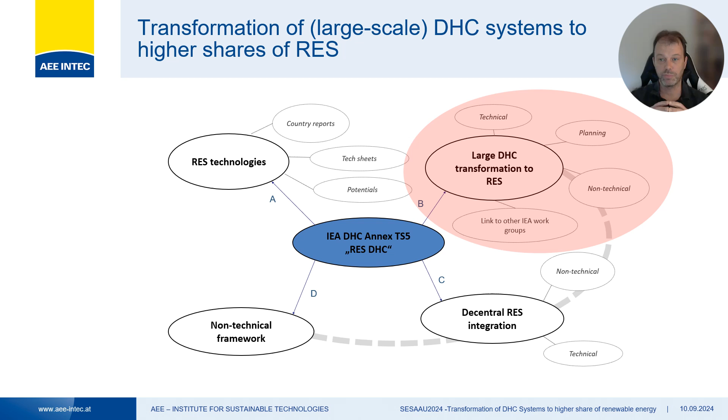We also focus on how to get renewables into the larger system, technical and non-technical things here as well. What I will be talking about today is largely subtask B, focusing on the transformation process from different points of view. Now let's continue.

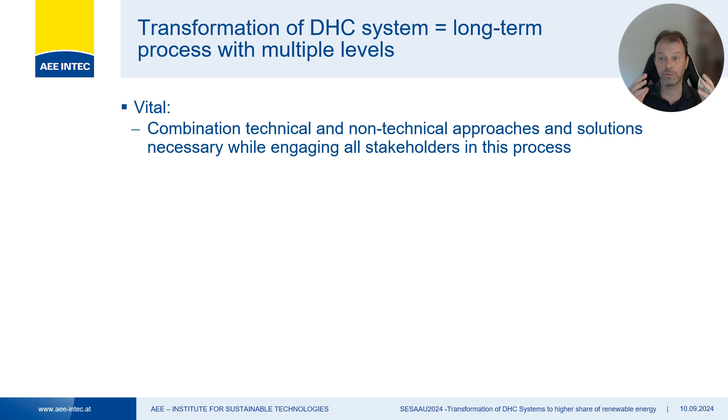We see transformation processes as a long-term process with multiple levels, and we've concluded within the project that it's vital to combine technical as well as non-technical approaches and solutions in the process, while it's really important to also discuss and talk with all these stakeholders in the process.

How we came to that conclusion is we looked at different international case studies. We tried to identify what the bottlenecks, challenges, and key enablers were in the transformation processes, and which steps and interventions were done to really make a step forward.

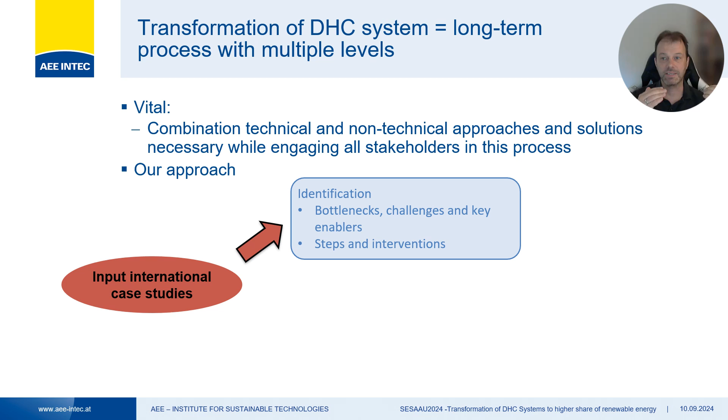Like I said, it's a long-term process, so not all of the systems and case studies we investigated are concluded, but we looked at the steps already taken and analyzed them. Based on these conclusions from the case studies, we tried to define something like a guideline, a checklist, for how you can do the transformation process.

We also checked this transformation guideline with some pilot studies, to get information on what might still be missing and what we still have to add.

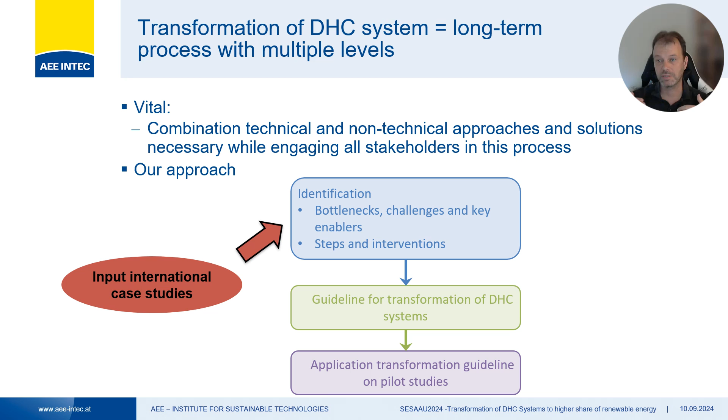We had in total 7 larger case studies that we investigated, plus a couple of smaller ones. We looked specifically for information on basically every aspect of such a transformation process, so we looked for instance at what was the goal, what was the timeline, what was going on, what was going well, where were the problems, and so on.

To give you an example of what we did, here I focus on the example of Lviv in Ukraine. We checked how the system is behaving and how large it is. Lviv is one of the larger cities in Ukraine, located in the west of the country, and it has an outdated district heating system, or rather separate ones across the town, with heat supply currently largely provided by major gas CHP installations, with some smaller fossil fuel-based units as support.

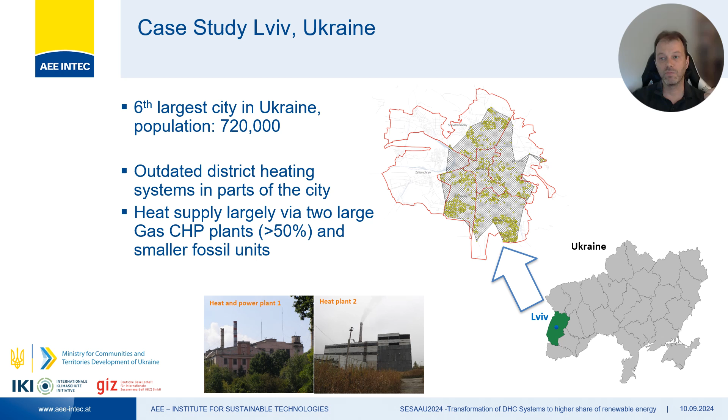So what we did in the process there was analyze the steps. They did an analysis of the gas consumption, what is happening on a daily basis, and tried to come up with something like a plan for how they can reduce that over time in different steps.

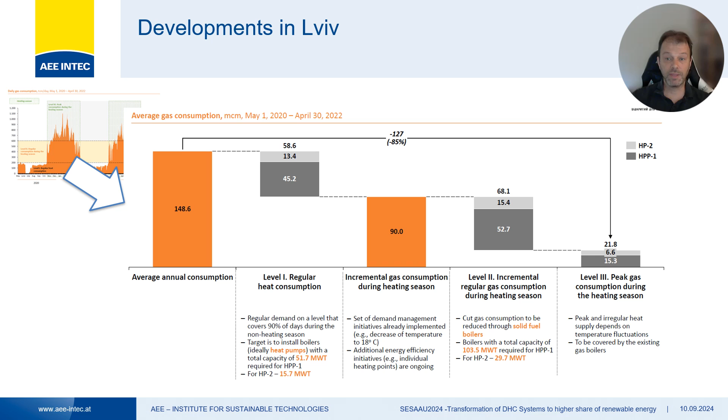Then they looked at what might be potential solutions or spots to really go for district heating, to densify the systems, or to go for other solutions. Based on that, they came down with an actual plan for how they can implement the different measures.

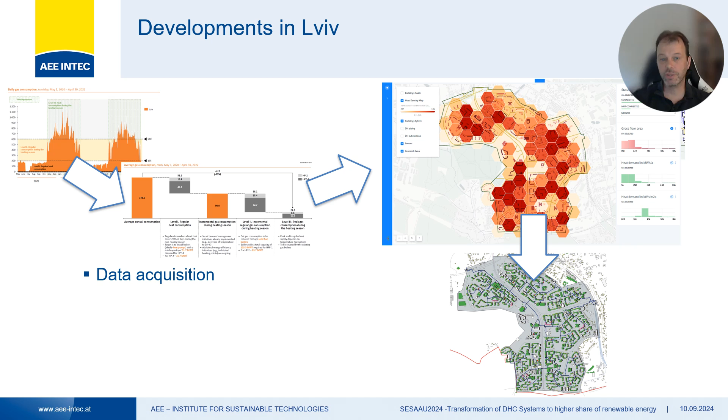During the process, they had to look at different things they weren't aware of so far, meaning data acquisition, spatial energy planning, capacity building, stakeholder integration, and basically how to do good strategic planning in relation to short-term measures that were necessary over the last couple of years in Lviv because of the war going on. Now, this was the foundation for us to proceed with our analysis.

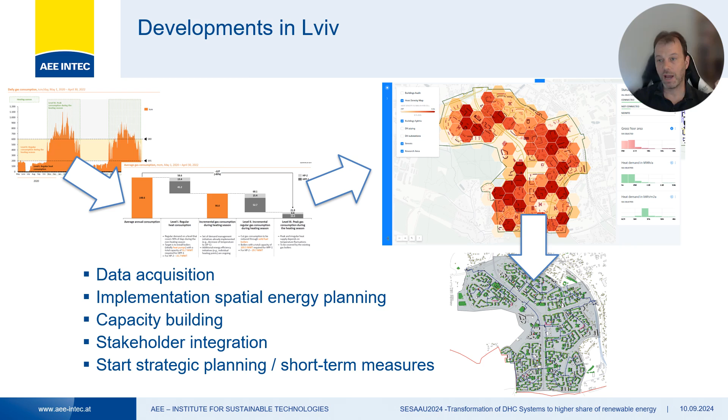So now I'm coming back to the picture of this tree in the background and the saplings in the foreground. To make it really happen that a sapling like the ones in front can really grow towards a larger, healthy tree like in the background, there are different things that are really necessary.

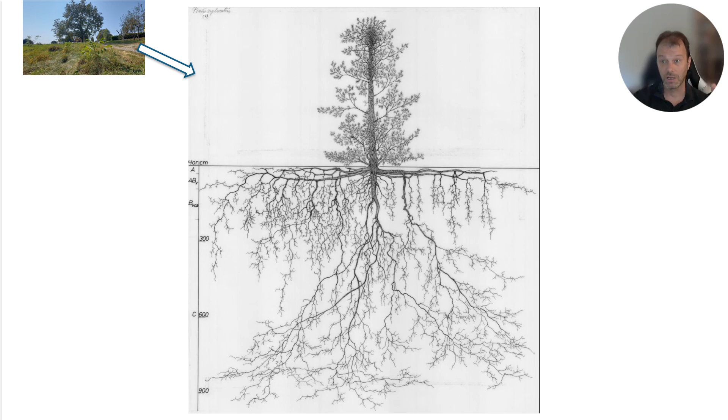Most of these things are not directly on the surface, but located in the background, in the soil in this case, or even beyond what the tree actually can do on its own, respectively what the surrounding can offer. So you might have all these assets, all this infrastructure available, but underneath there are different processes, different things that have to be aligned to really make a transformation happen.

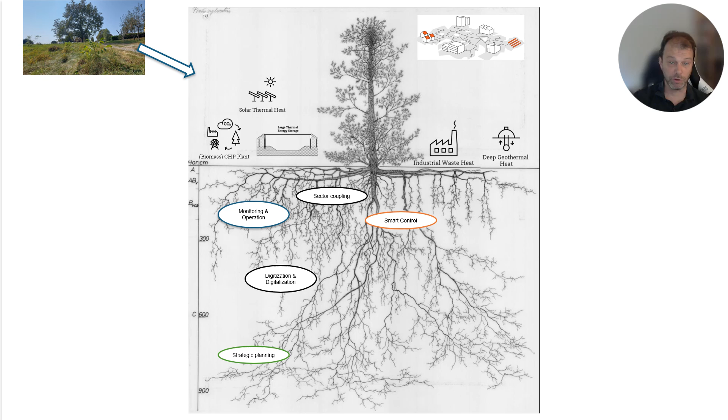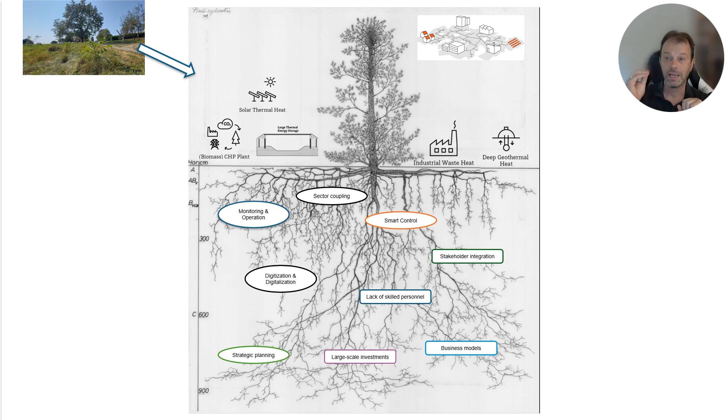You can look at different technical aspects like monitoring and operation, like smart control and strategic planning. But on the other hand, you also have to think about non-technical things that are important to let your system grow into a healthy, sustainable one. You have to think about the stakeholders, the business model that's necessary, and also check about the financing.

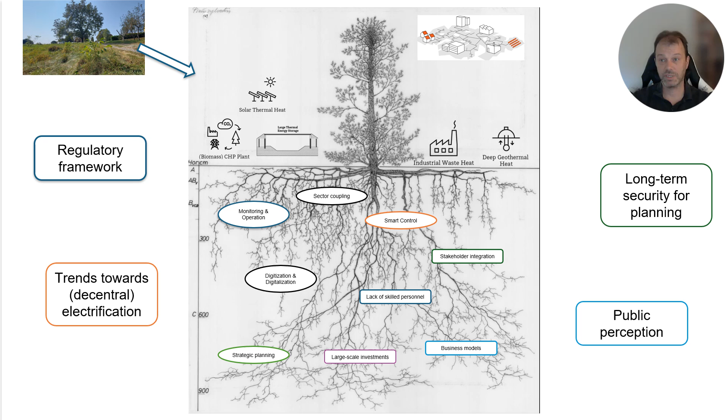Beyond that, there are things that are in the circle of concern for the district heating operator, but are not really influenceable by them. It can be down to legislation, public perception and so on, but these are nevertheless things you have to tackle and address during your transformation process. You might not change them all, but you at least have to be aware of them.

So what we did in the TS5 is we looked at the non-technical challenges that we face, tried to find some good, simple advice on how you can approach them, respectively refer to different case studies or other projects that can give you a clue on how to continue.

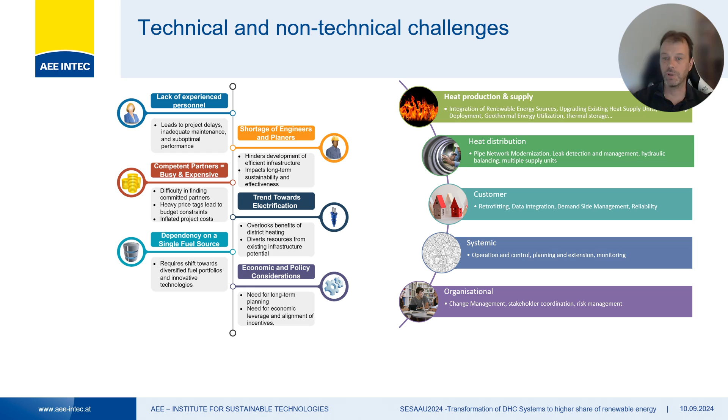We did the same also for the technical side. I guess that's something you're more familiar with, from supply to distribution, customer, systemic and organizational things. And what we did there as a final step, we came up with an overview of these challenges and tried to give some quick guides on how to tackle them.

Now this leads us to the main part we've been working on: how to do a transformation. The objective of a transformation plan for a district heating system can be described with three bullets: you have to think about the conversion over time, what is done technically, how you can actually do the whole thing by a certain date and time, and also you have to do the whole transformation while being economically viable and, of course, supplying your customers all the time.

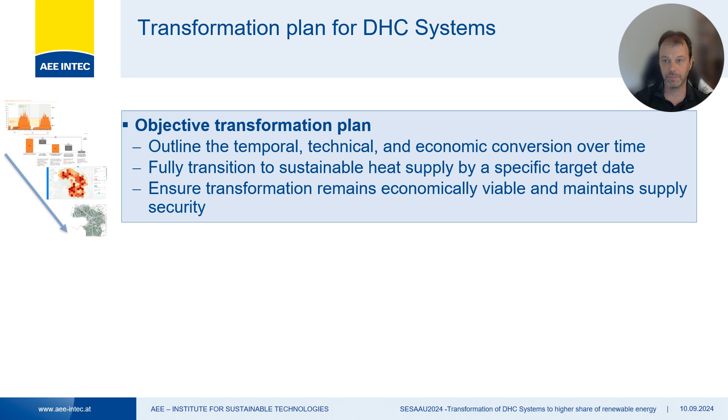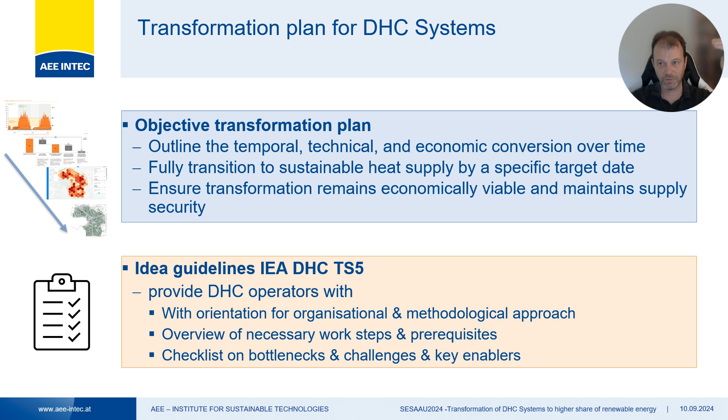So what we did for this guideline within the TS5, we cannot cover such a process in all details because there are too many nuances, too many details per system to think of. What we try to aim for is to give DHC operators an orientation on what they can do in terms of organization and methods. We try to give an idea on the steps and prerequisites, and also provide them with a checklist - think of this, think of that when you do this and that.

So what we came up with is something like a stepwise approach. It's not really rocket science, but it's still important to really think about the details that you have in such a transformation plan.

Starting off your whole transformation, you should think about setting your goals and a long-term vision. This has to be done in relation to, e.g., your municipal heat planning - I'll come back to that in a second - but also to your company strategy. What do you want to do in which time frame?

Then you go down to analyzing and evaluating everything that's around. What's your status quo? How do you want to grow in future? What has to be modernized? Based on that, you select a pathway - this is what we have in mind overall - and based on this, you go towards really planning all these individual measures.

Of course, you have to think about that as an iterative process. So you go back in time to your previous steps and think about, is this actually still something that we can do? Has something changed, and so on? This is the overall flow that you can use to structure everything.

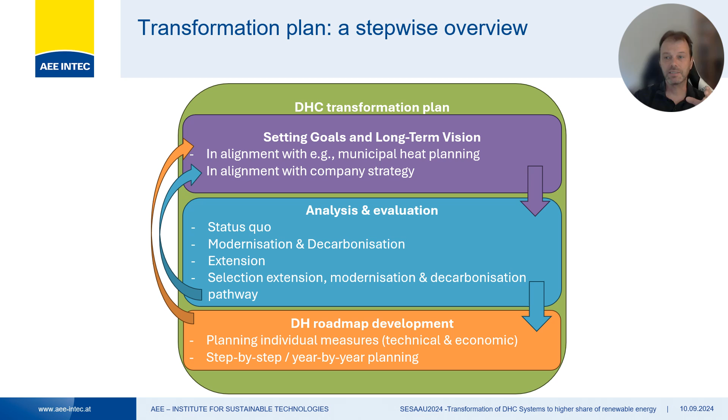This needs nevertheless to be supported by at least a couple of additional things. You have to really be thinking about how you get all your stakeholders into the discussion - that can be your customers, public authorities, the cities, or whoever else might be important for your process. Another vital aspect is getting all the data sorted out that you need for such a process.

I think you are familiar with that problem, but this is absolutely essential if you want to do all these things I'm talking about. Having this data available - may it be operational, a network plan, or results from previous projects or feasibility studies - this is something you have to sort out really in the beginning. And this is something that comes back from every case study we looked at: getting good data, sharing that data, is vital, especially in the beginning.

Alignment of these things with a company strategy is also important. You have to check what your overall vision of a company is, what your goals are, and relate that to your business field, the district heating system. This is something important and has to be done early on.

What's also important is that you have, for such a transformation plan, a really dedicated team with the resources and the expertise to really go forward and do these things. This is absolutely vital to have.

Then a point I've touched upon earlier, municipal heat planning. Why is this alignment especially necessary? There's a lot of discussion going on both items, and sometimes in this discussion they are mixed up. They are interlinked for sure, but they're two different sides of the coin. The transformation plan is really focusing on the DHC system only, and it's the item that the operators, the owners, have to be pushing forward.

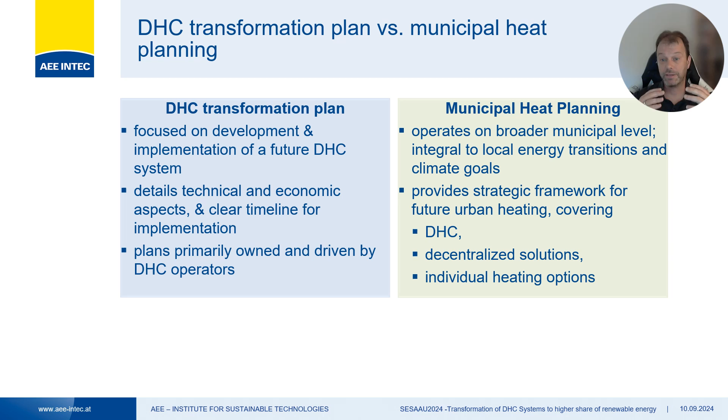Municipal heat planning is on a municipal level, so you have to think about that. There you also include local energy transition ideas, climate goals, and so on. It also thinks beyond the district heating system, including decentralized solutions like microgrids, and individual options like heat pumps, biomass boilers, and so on.

Nevertheless, both of these processes have to be aligned, because this ensures that you can use combined forces, have the synergies, talk to the authorities, make things smarter and smoother, but also talk to citizens and customers easier and say, okay, we're going to extend our systems and be available for you in a couple of years. This really minimizes risk, like stranded assets, like not having gotten enough customers. So this alignment is something that is really necessary to have.

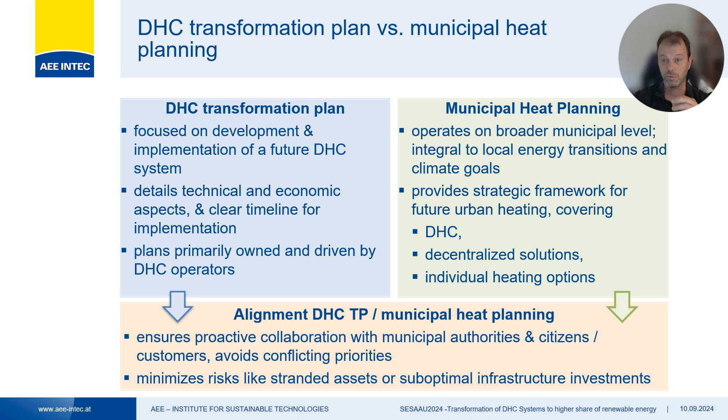Moving a bit forward to the analysis and evaluation of the roadmap development, this is something I guess is second nature to most of you, so I won't go into much detail, because you can hear about it during the two days here in Aalborg in absolute detail on different aspects.

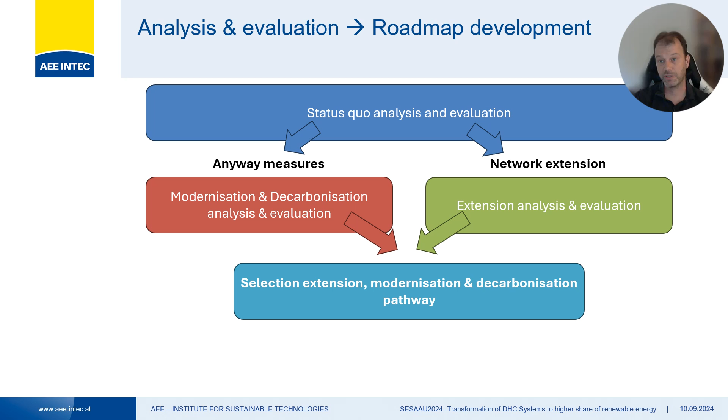What you have to think about for this part is really thinking about what is happening, what is the status quo, what are the things you have to do anyway to become modernized and decarbonized. But also you have to think about where you're going to be supplying heat in the future, where you can densify, where there are more areas in your town you can go to. Based on that, you select a pathway for the future, and this leads to actual planning and actual implementation.

To distinguish them a bit in level of detail: the upper ones focus more on concept development and feasibility studies, while the lower one focuses more on the basic and detailed engineering.

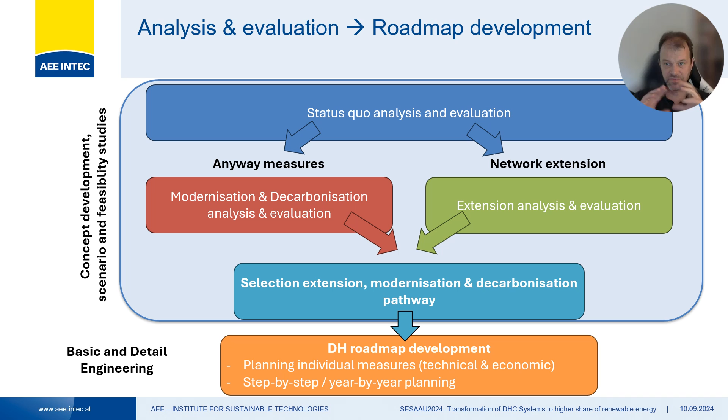This is a bit of the conclusion of everything today. I know this is just scratching the surface, I can't give you that many details in this amount of time available. I think it should be more like an appetizer of what you can still expect to come from us.

What we'll have later on as an output for you all is this analysis of the case studies. Then we've got this overview of the technical and non-technical challenges. And we also provide a guideline for you to use, to test, to apply, to modify in discussion with your DHC operators, respectively what the DHC operators can use directly.

Where can you find out more about all these things? This is something we will be working on over the next couple of weeks and months. We try to push the dissemination forward in Q4 2024 and Q1 2025. There are going to be webinars and reports on all of that, what I've described right now, respectively on all the other items of TS5.

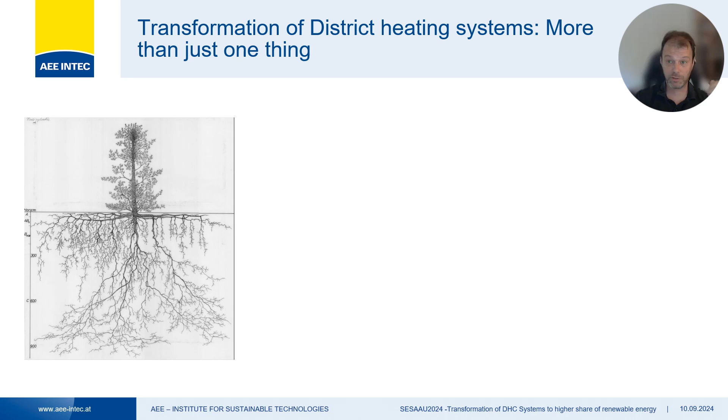I hope you've enjoyed this presentation a bit. It gives you a glimpse of what we've been working on and what we try to make happen. Coming back to my picture of the tree, I think if you apply all these things to your tree, you make it also really into a shiny, nice example that you would like to put even into your living room. With that, I would like to close my presentation.